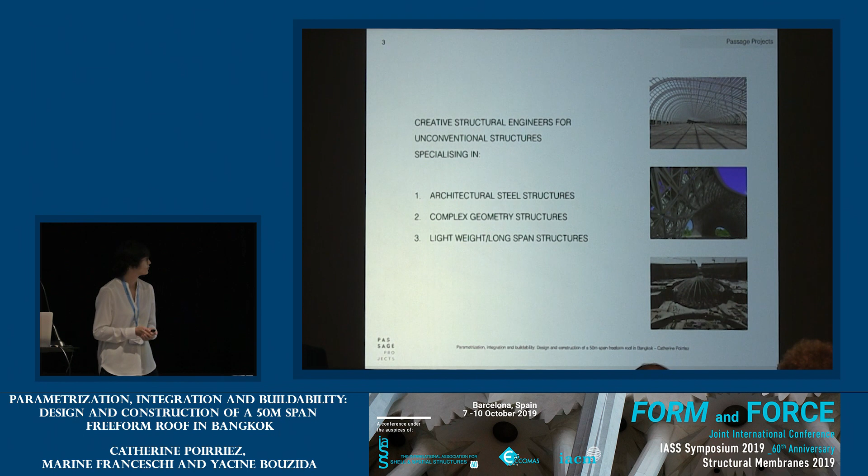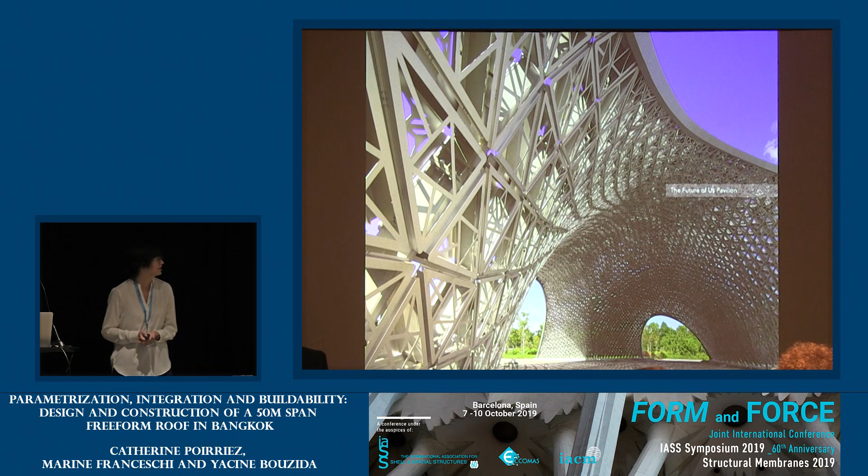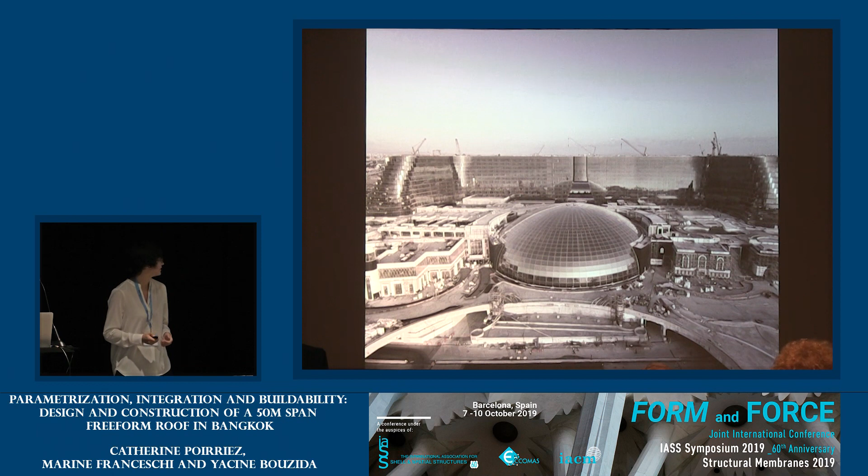Among some of the projects that we did, this is a grid shell in Singapore, a 50 to 60 meter span grid shell that we presented a few years ago at IASS, just down Marina Bay Sands for those who know Singapore. A steel and ETFE roof in Singapore as well, and a 100 meter span dome in Manila that we presented 2 years ago at IASS. And this is the Whizdom roof in Bangkok, which is the subject of today's presentation. This is an external view, and here is an internal view.

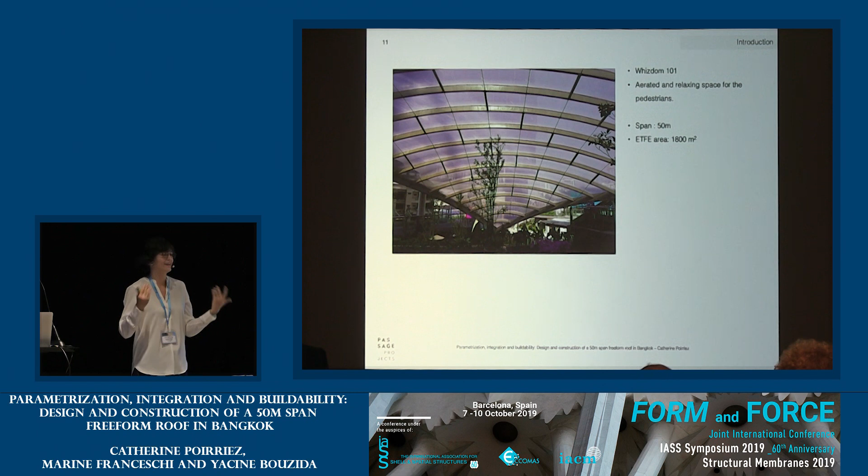Whizdom 101 is a new, high-end, fully integrated and digital mixed-use development that comprises both residential towers and commercial spaces. The center of the commercial spaces is covered by a 50-meter span steel structure that is covered by about 1,800 square meters of ETFE. It provides an aerated and relaxing space for the pedestrians.

We can see here a plan view and an elevation of the roof with the main dimensions. So the span is 50 meters, the length is about 56 meters, and we can see on the elevation that the roof is spread over 3 levels. For the supporting conditions, we have 4 primary support points spread over 3 levels, and 3 secondary support points. The secondary support points are here for vertical loads only.

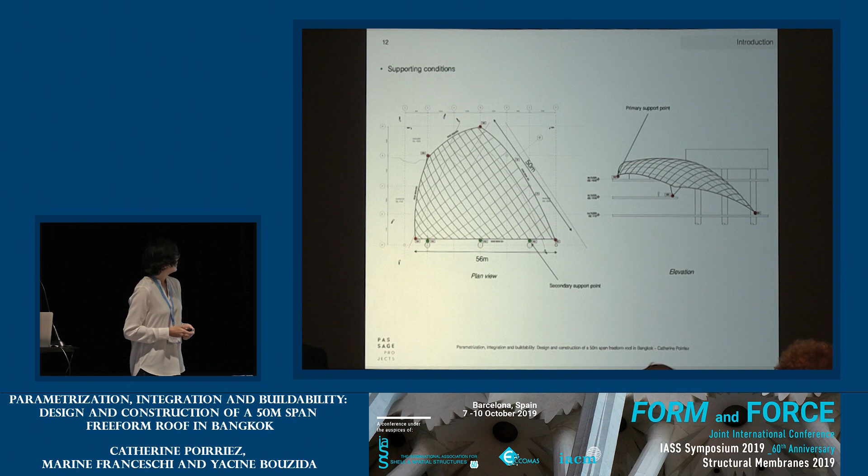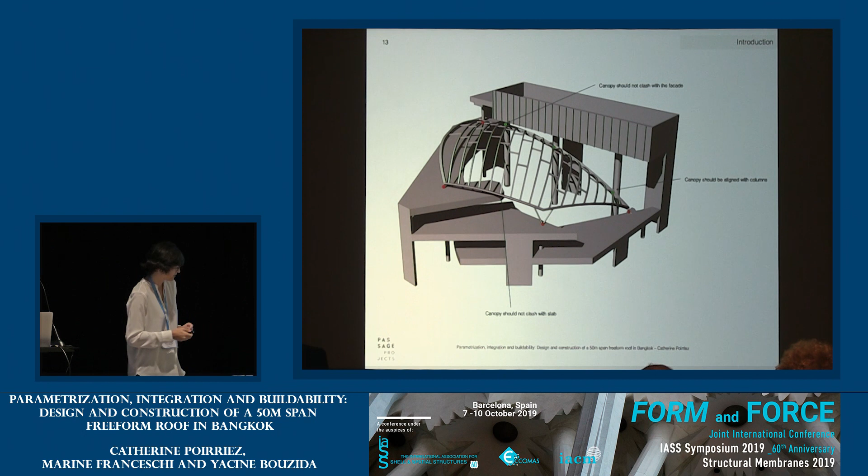It is probably better if we see it in 3D. So in 3D, we can see in red the primary support points and in green the secondary support points. We can see here that the space is quite constrained for the roof. Some of the main constraints that we had were first that the canopy should not clash with the facade. The canopy should be aligned with the columns along the tower. And the canopy obviously should not clash with the slab.

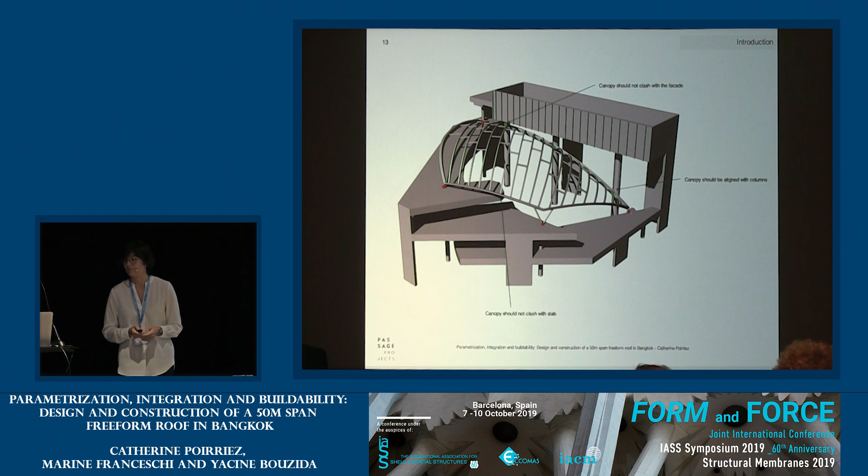In terms of structural design, the design follows the American code. The roof should be designed to sustain its own self-weight, the weight of the ETFE and the aluminum extrusions, which was estimated to about 10 kg per square meter. The weight of the M&E, which is lighting, fans, for example, which was estimated to 10 kg per square meter. In terms of live load, it's only for maintenance, so it's 24 kg per square meter.

Wind loads were defined based on a wind tunnel test, and pressures vary from 0.5 kPa to minus 0.75 kPa, applied normal to the roof surface. Load combinations follow the American code. There are small earthquake loads in Bangkok, but they are very small and did not govern the design, so I will not go into more details about that here.

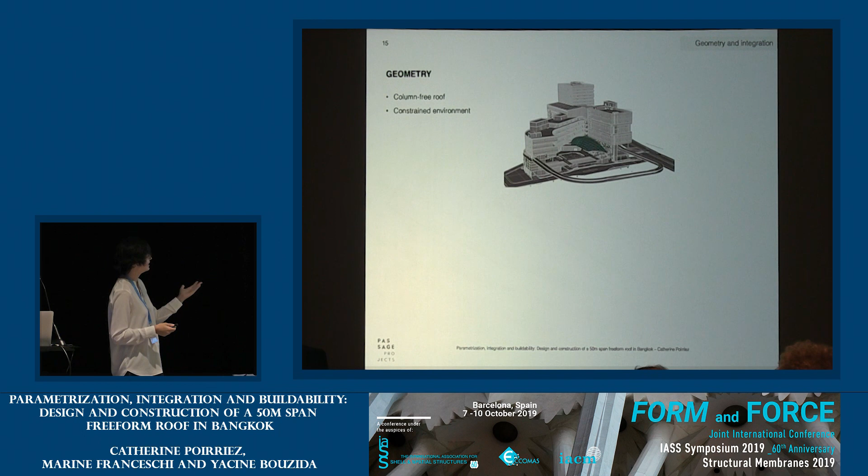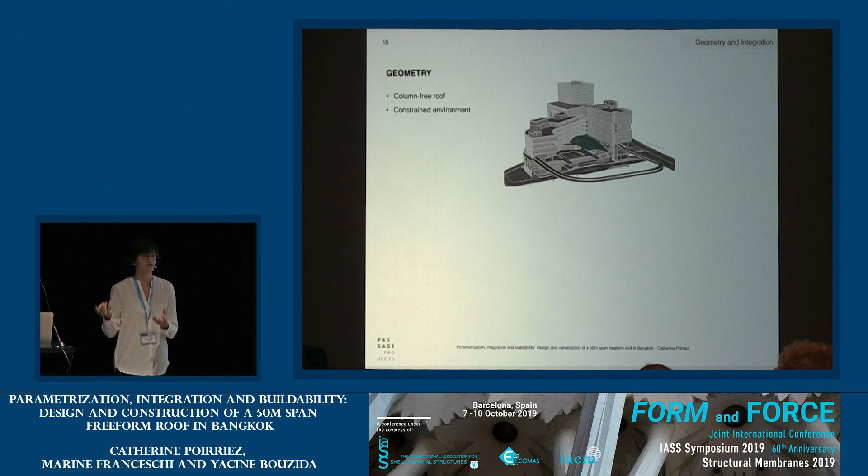In terms of geometry, the client wanted a column-free roof, but we saw previously, and we can see on this image that shows all the towers around the roof, that it's a pretty constrained environment. So we did several iterations and studied several options in order to find a structure that best fits in its environment and with the supporting conditions that we had. So we have here 3 options that we studied at early stages of the design.

We wanted to have a roof that was elegant and that provided a sense of relaxation, basically, for the commercial spaces. So option 1 is obviously not very elegant, so it was quickly eliminated. Option 2 presented, let me try to see if I can make that work. Yes. So option 2 presented a kink in the surface around here, because we were trying to connect to the mid-level support.

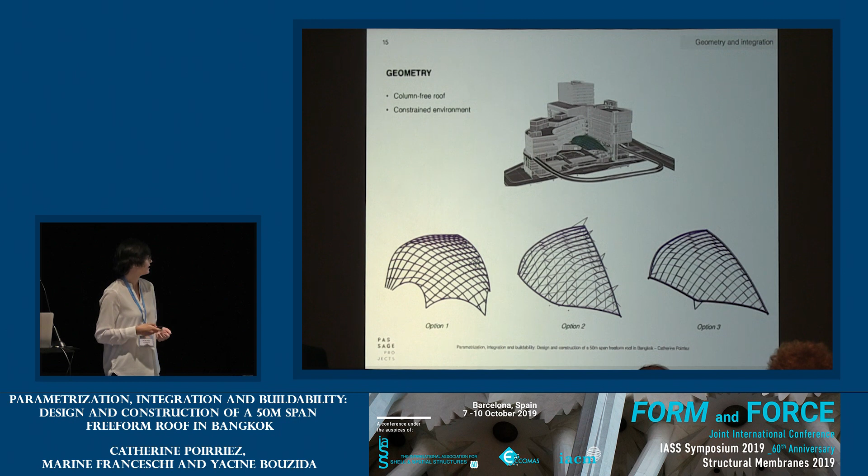So the kink was not very pleasant architecturally. Option 3 consisted of keeping the same kind of system as option 2, but introducing a column which enabled us to keep the surface reasonably smooth and elegant. So this was the option that was adopted.

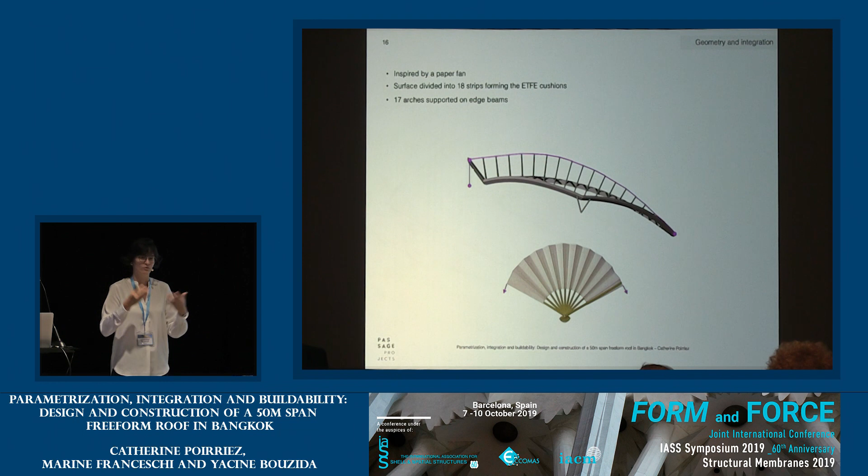So the surface is inspired by a paper fan. It's divided into 18 strips that form the ETFE cushions. And these 18 strips are supported on 17 arches, which themselves are supported on edge beams that spread back the loads to the supports.

A 50-meter span cushion can be a bit long, and so in case of damage of a cushion, it could pose a risk to operations of the mall while we wait for a replacement of the cushion. So we suggested that these long ETFE cushions were divided into several cushions in order to reduce the risk for the client and to facilitate the replacement in case of damage.

We can see here the cushion layout, and longitudinal beams between the arches were added in order to divide the cushions. So we can see here in 3D, we have the longitudinal beams that were added between the arches and the edge beam. Of course, the longitudinal beams have a second purpose. They provide a restraint for the arches.

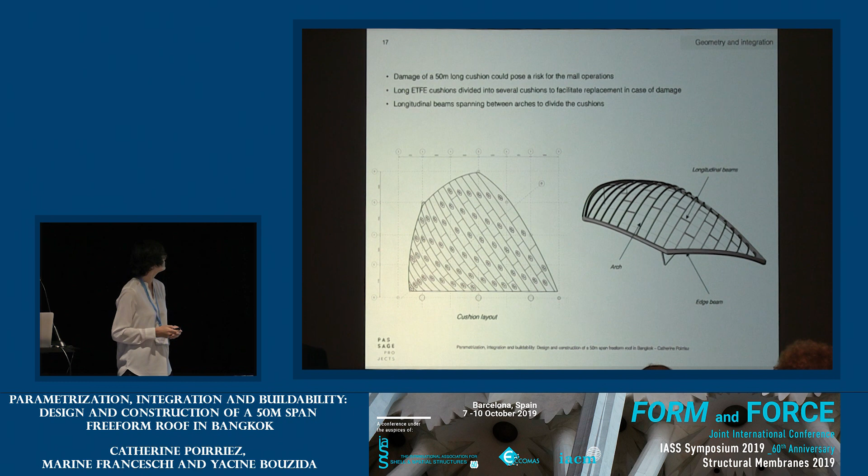So in Thailand, rain events can be pretty heavy, so you need to have a gutter in order to avoid water free flow in the commercial spaces. So we needed a gutter around the roof, which means basically around the edge beam. The gutter dimensions were defined by the M&E engineers to be 800 millimeter wide by 250 millimeter deep. And the roof was treated as an architectural feature, so we want the gutter to be treated as an architectural feature too. For that, we studied several options.

The first option was to have a cladded aluminum gutter. This is basically a traditional gutter design. We have an aluminum gutter connecting to the edge beam. In order to keep this nice architecturally, the gutter would have to be cladded, and this cladding would have to be segmented. So, first, the segmentation would not be so nice, and secondly, it would have a lot of joints, which would present a risk of streaking in the long term, which would not be very pleasant architecturally.

The second option was to have a steel gutter connecting to the edge beam. The steel gutter would have roughly the same shape as an aluminum gutter, but it can be curved and it does not need to be cladded. But imagine we have an edge beam that spans between 25 meters to 50 meters that supports the load from arches which are 50 meters span. So the edge beam is already quite big. And next to it, you add a gutter that is already 800 millimeter wide. So the whole buildup of gutter plus edge beam would have to be quite big, which would not be very elegant.

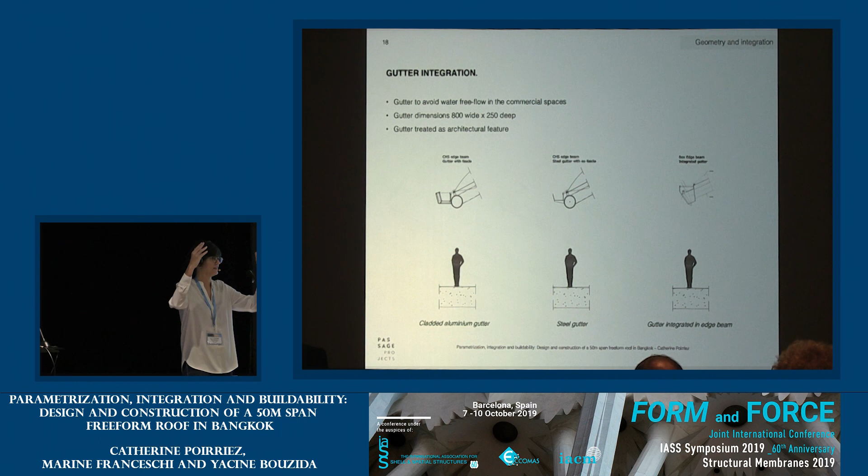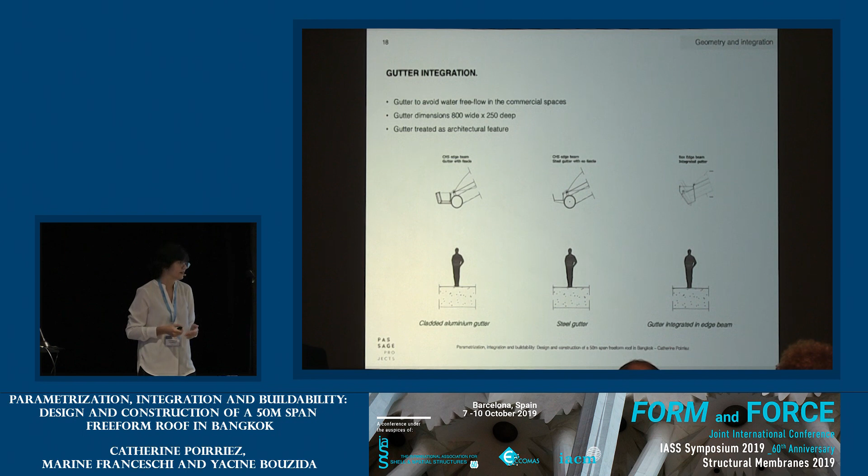So the third option that we considered and that we chose was to integrate the gutter in the edge beam. For that, it was basically to do a steel section with two ears protruding out of the section and creating the gutter just on top of the section. Because this section is quite big, we decided to use pentagonal sections that translate into a language of lines, which is a bit more elegant from an architectural point of view and looks a bit slimmer than if it was just a really fat section.

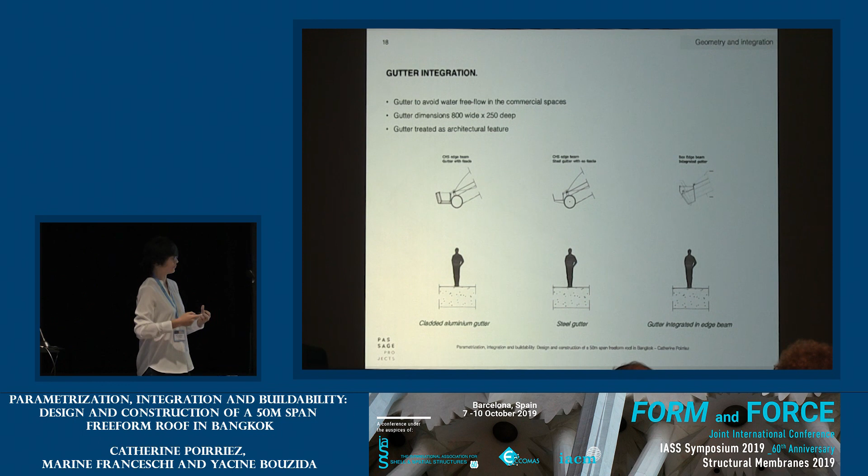I said previously that the longitudinal beams provide a restraint for the arches, but additional bracing was required to properly restrain the arches. We decided to use tension rods in order to keep the structure reasonably light-looking and to facilitate the installation. So we have studied several bracing patterns. Four of them are shown here.

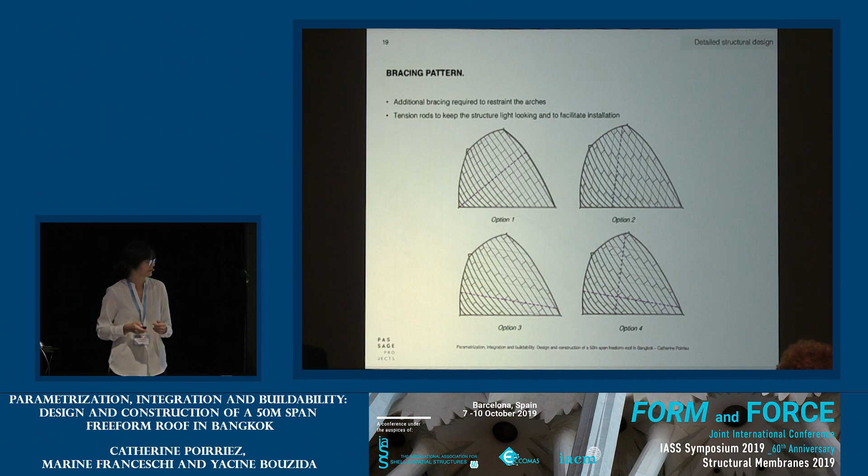The first one is to have a bracing that is parallel to the longitudinal beams. The second one is to have a bracing oriented at 45 degrees from the longitudinal beams. The third one is the other 45 degrees. And option 4 is to have the two diagonals. Option 4 would require twice the number of tension rods and twice the number of connections. So from a cost point of view, that would be more expensive, so we decided to quickly eliminate it.

We've done a comparison between the structural efficiency and the elegance for each option. The roof design is governed by deflections, so structural efficiency was measured by comparing the deflections of the roof under wind load. We can see here some analysis results of deflections under wind load for the three options, and a comparison table with results for each bracing pattern.

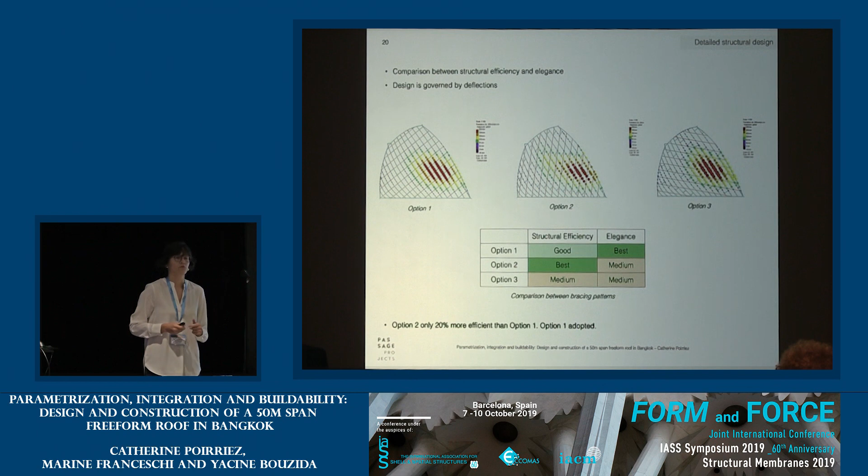So option 1 has a good structural efficiency and the best elegance. Option 2 has the best structural efficiency and a medium elegance, and option 3 was quickly eliminated because it has a medium structural efficiency and a medium elegance. So the question now is which option to choose between structural efficiency and best elegance. Option 2 was only 20% more efficient than option 1. So we decided to choose option 1 because it was the best compromise between structural efficiency and elegance.

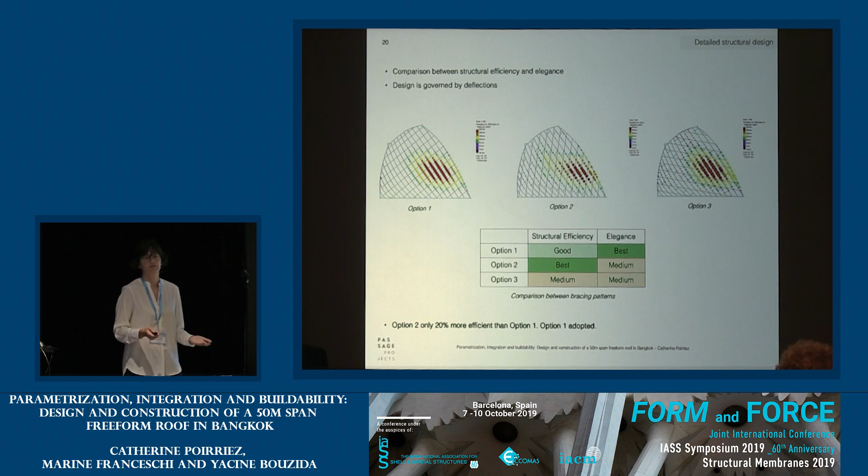Global stability of the roof was checked with Eurocodes because it gives a little bit more detail than the American codes for such structures. So a linear buckling analysis has been carried out to find buckling modes with buckling factor lower than 10. And then a geometrically nonlinear analysis with imperfections included was carried out for buckling modes which have a buckling factor lower than 10. Imperfections have been added in the model by using the deformed shape of the buckling mode for the buckling modes which have a buckling factor lower than 10, but just one at a time.

We can see here the first buckling mode under wind load. So the structure works as a series of almost independent arches. So it's not really subject to global buckling, and it's not really subject to snap-through either.

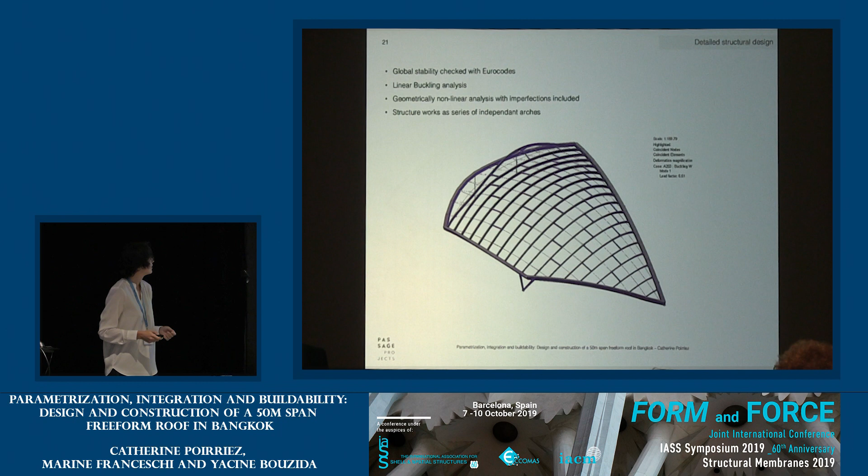So as a conclusion on the structural system, we have arches that are rectangular hollow sections from 500 millimeter deep to 325 millimeter deep. They transfer the forces to the edge beams through compression and bending, and tension as well if we have uplift. Edge beams are pentagonal hollow sections. They integrate the gutter. They spread the loads back to the support.

Longitudinal beams are I-beams. They provide a restraint to the arches. I will explain later. They're supposed to provide support for the cushions. And bracing are made of tension rods, and they provide a restraint to the arches as well.

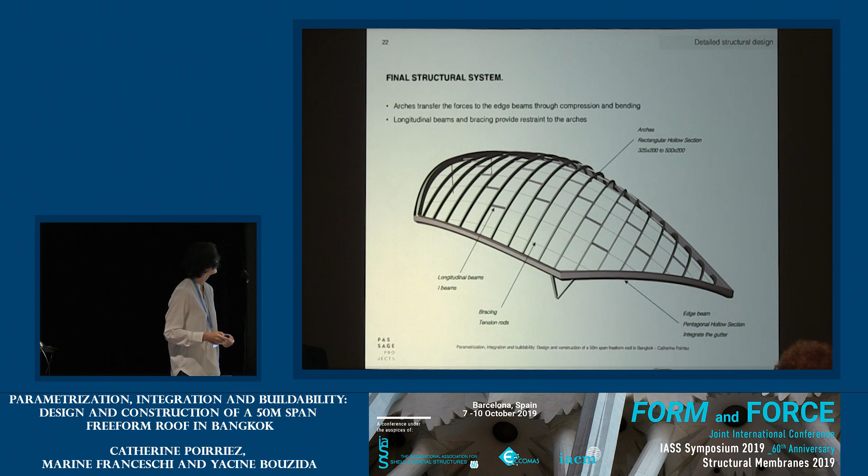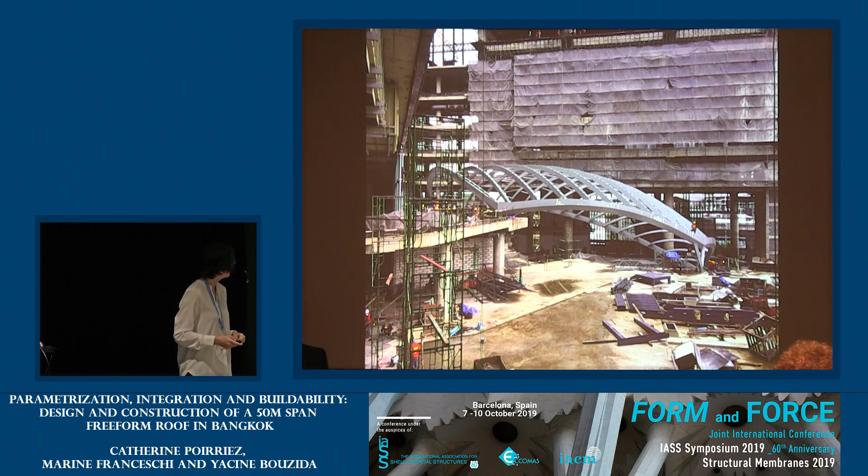Some images of the construction. We can see that the gutter was used by the workers as a working platform, which was very useful. And images of the inside.

So we saw that the geometry of the roof is reasonably complex, but it must be buildable in the end. And it's very important to be able to communicate this buildability simply to the fabricator, especially since with Thailand we had a little language issue. So it was very important for us to be able to simplify with really basic geometrical principles so that the fabricator could understand how to fabricate and build the structure.

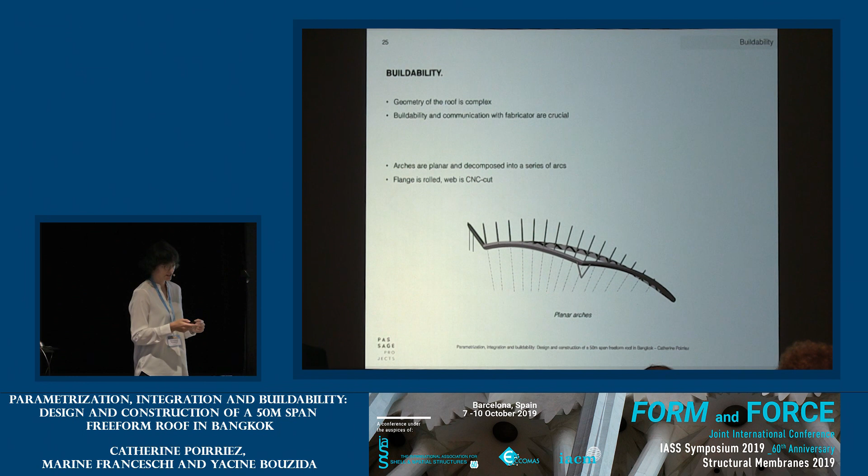For the arches, that was reasonably simple. The arches are planar and decomposed into a series of arcs. We've decided to use built-up sections, so the rectangular hollow sections are made of plates, which means that the flange can be rolled and the web can be CNC cut.

The edge beams are pentagonal sections, as I said previously, and we had three main constraints on the edge beams. The first one was that the gutter bottom should always be horizontal. This was to enable installation of the rainwater downpipe outlet system, and this is a constraint that was given to us by the rainwater downpipe outlet contractor.

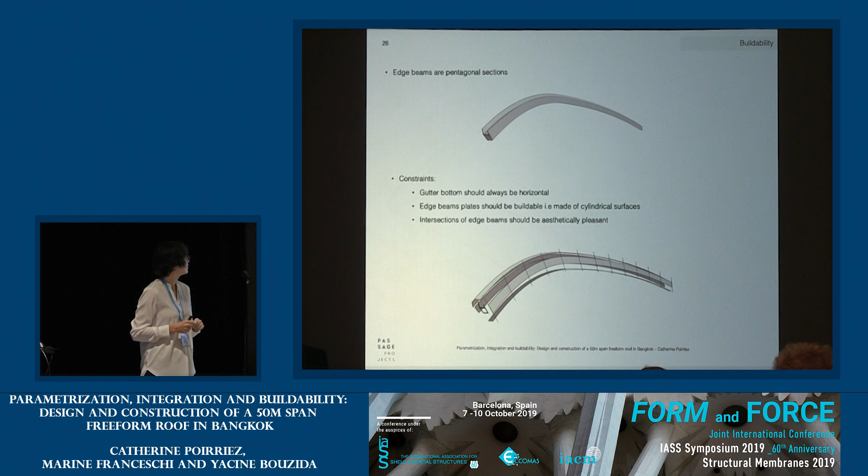The edge beam plates should be buildable, which means that they should be made of cylindrical surfaces. And the last one was that the intersection of the edge beams at the corner of the roof should be aesthetically pleasant. The section that we chose for the edge beam and the geometry that we chose for the roof did not really facilitate our life on that part.

The edge beam center lines are curved and planar. We can see in red here the edge beam plane. And on the section, there is only one plate that is parallel to the plane of the beam. And we can see there is no plate that is perpendicular to the plane of the beam. So the plate that is parallel to the plane of the beam is reasonably simple. It's just planar.

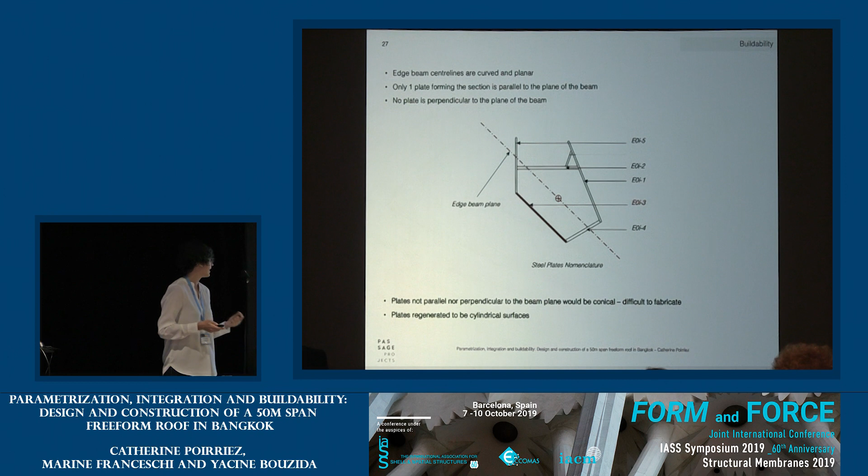But the other plates, which are not parallel nor perpendicular to the beam plane, would be conical. Conical surfaces in steel can be fabricated, but it's a bit more difficult and it's a bit more costly. So we didn't want to do that, and so we had to regenerate all the plates with cylindrical surfaces. This was done in two phases.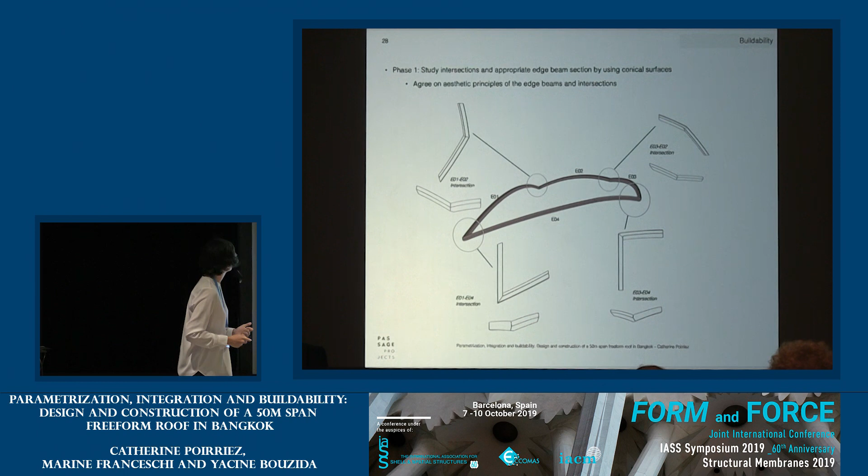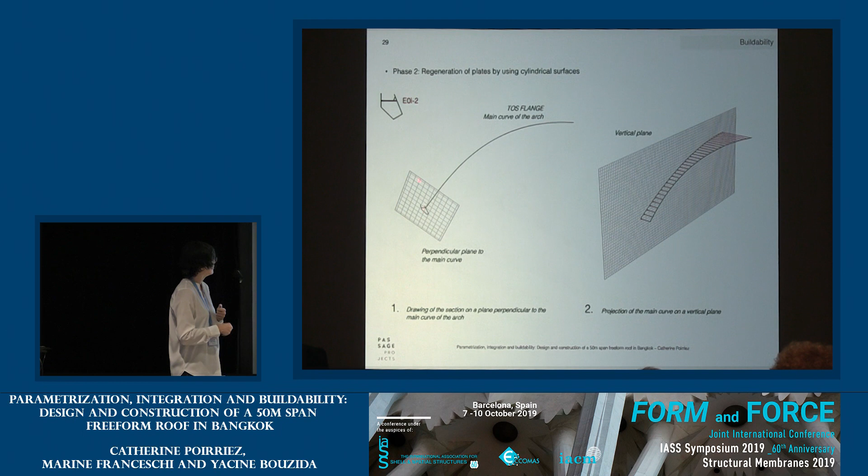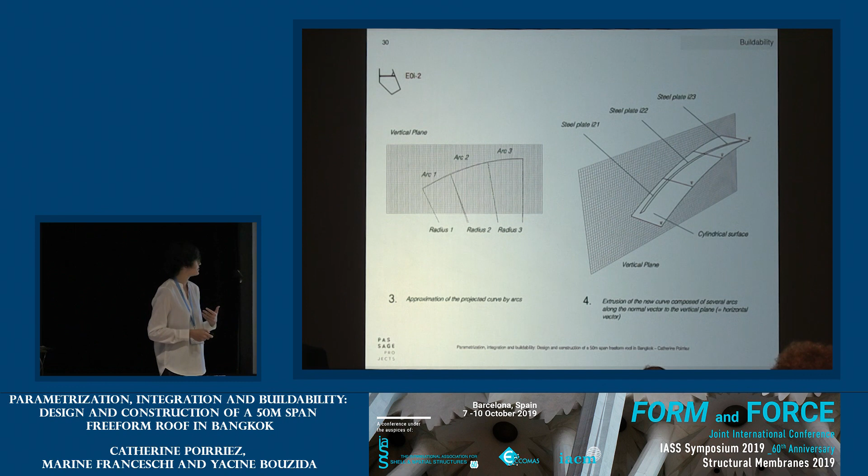Once this was done, we could regenerate all these plates by using cylindrical surfaces. So we did that by using a series of projection and approximation into arcs. So if I take the example of the gutter bottom, what we did is we took the gutter bottom plate, which is this little one, oriented perpendicular to the main curve, and we drew a vertical plane that is basically kind of normal to this section. We projected the main curve on the vertical plane. The new curve obtained on the vertical plane was then approximated into different arcs, and then the arcs were extruded into cylindrical surfaces, and the plates could just be redrawn on the cylindrical surfaces.

So these steps were repeated for each plate and each edge beam, and of course, because of the projection and the approximation into arcs, we had small deviations from the initial conical surfaces that we had done. So to ensure that we have a perfect intersection for each edge beam, we established a parametric model in order to be able to move the edge beam points until we have a satisfying result. So for example, in black here we have the points of one edge beam, in red the points of the other edge beam arriving at the intersection, and we just moved the points on the parametric model to get a perfect intersection.

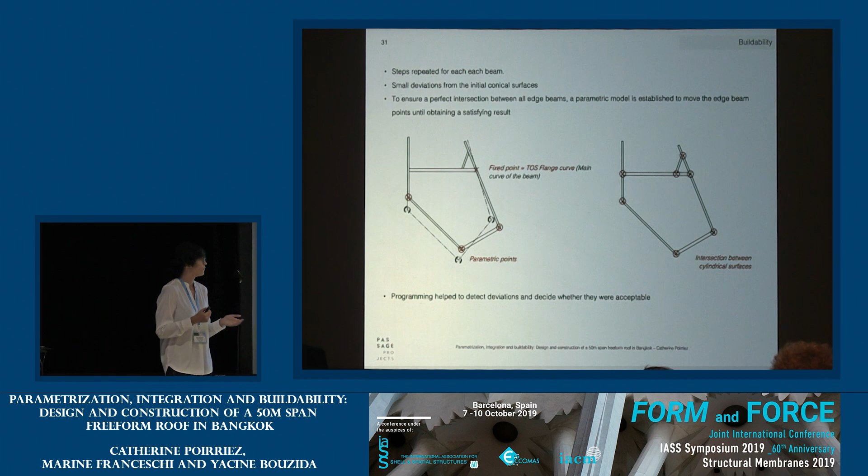So I said earlier that we had 3 main constraints on the edge beam. So first, to have cylindrical surfaces. Second, to have nice edge beam intersections. And the third one was to have a horizontal gutter. So life would be too simple if we managed to have the 3 of them perfectly. So I just showed that we achieved the first 2, and the third one was geometrically impossible to achieve with reasonable lengths of plates. So we used programming to detect the deviations of horizontality in the gutter plate and decide if these deviations were acceptable or not. For us, these deviations were within the tolerance of fabrication of the steel and the tolerance of the rainwater downpipe outlet system installation. So they were considered acceptable.

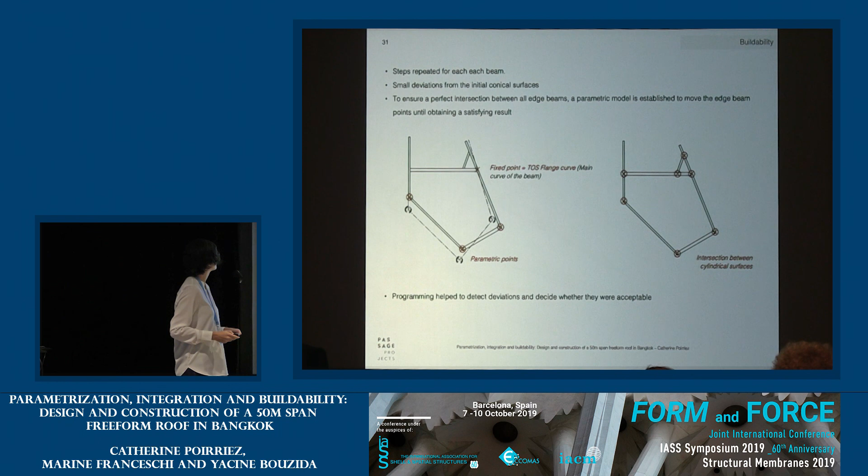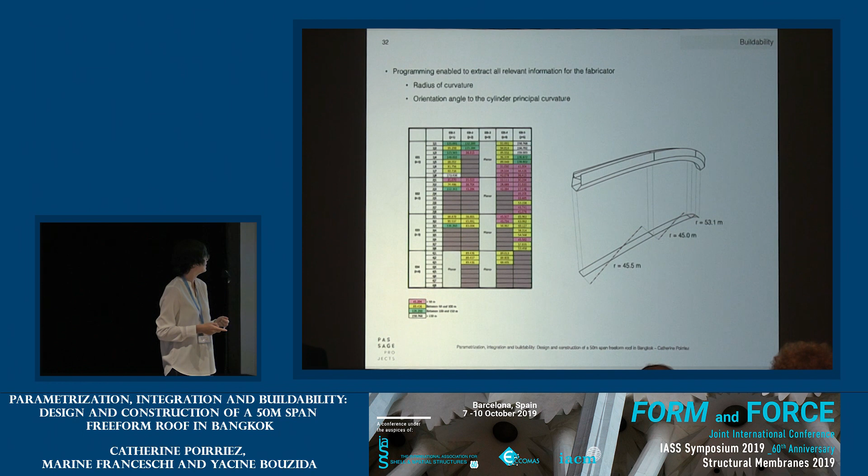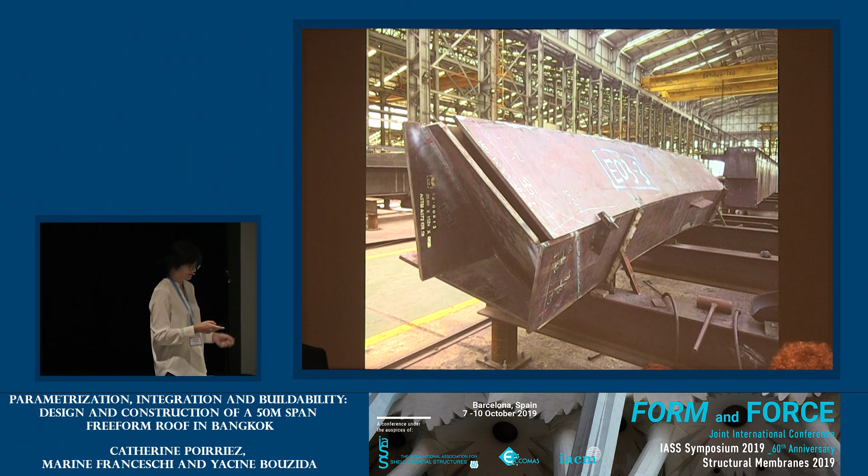And programming also enabled us to extract all the relevant information for the fabricator, which means basically for the plates of the edge beam, the radius of curvature, and the orientation angle of the plates to the cylinder principal curvature. As we can see on this image, the plate is part of a cylindrical surface, but is not necessarily oriented in the principal curvature line of the cylinder. So we had to give the angle to the fabricator. Here is an image of the fabrication of the edge beam, where we can see the plates being welded together with some internal stiffeners as well. And another image where we can clearly see the gutter basically here.

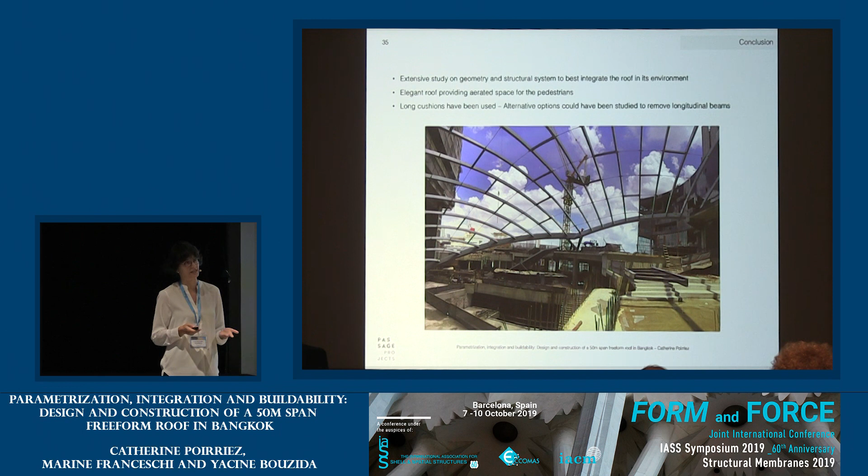So as a conclusion, an extensive study on the geometry of the roof and the structural system was done, and that enabled us to try and best integrate the roof in its environment. We think that we managed to achieve an elegant roof that is providing an aerated and relaxing space for the pedestrians. One thing to note is that at tender, the ETFE contractor proposed to use long cushions because they were reasonably confident that it would not pose a problem in case of damage of the cushion. So we didn't have further time to restudy, but with more time we could have studied alternative options in order to remove the longitudinal beams and have an even lighter looking structure. One image of the completed roof and another one.

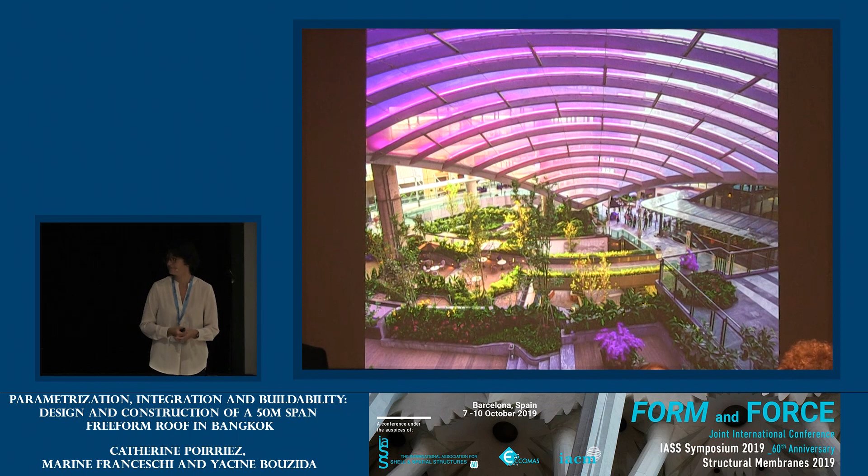Thank you very much, Catherine, for this amazing talk. Who would like to ask a question? That edge beam is just incredible. Some questions? Yeah, please. Should you? I don't know how this works. You're going to do it?

This edge beam, the built-up section, how did you compensate for the shrinkage due to the welding? It has a lot of welding. How did you compensate this? The geometry is very complex, though. Yes, it is very complex, and I have to say this is the amazing work of the fabricator. It's ITD, Italian Thai Development. It's a big fabricator in Bangkok, and they are pretty amazing for steel structures, and they really know how to play with the steel. So they manage all that part.

Okay. Are there any other questions? Mm-hmm. I'm going to ask a question. So you talk a number of times. I mean, I'm amazed by the complexity of the edge beam. I won't ask any questions about that.

You talk a few times about the structure being elegant, and also when you present the three options, you present, oh, this one is obviously not very elegant, and this one's much more elegant. How do you make those choices? It's a bit subjective. But I'm wondering, how do you have these conversations, or what do you talk about when you say this is more elegant than this? It is completely subjective.

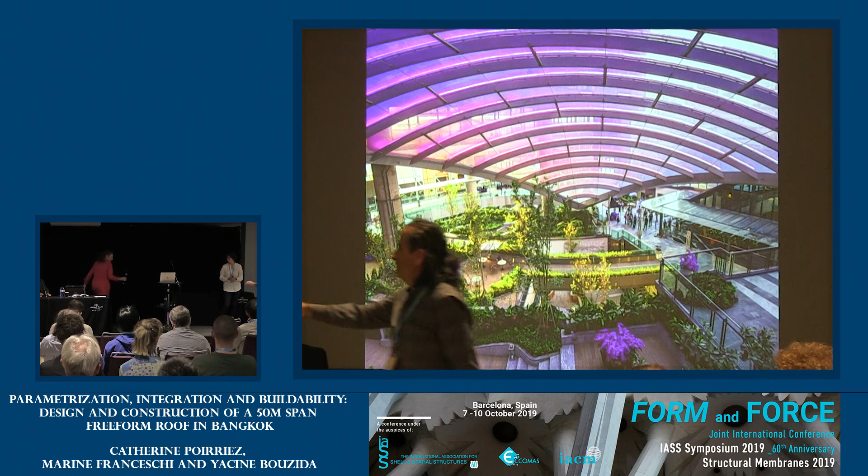Thank you for a very interesting presentation. It builds on Sigrid's question and how you answered it. So you tweak things. Was it all done with digital tweaking, or did you actually work with physical models to look at it, turn it around, go under it and above it? So we used mainly Rhino to do all the 3D modeling, and Rhino is quite helpful to look at it from below.

But at some point we made a 3D printed model so that we could show it to the client and help him understand how it would look in reality, because sometimes clients don't really realize how it is if we just show an image from the model. So we kind of used the two.

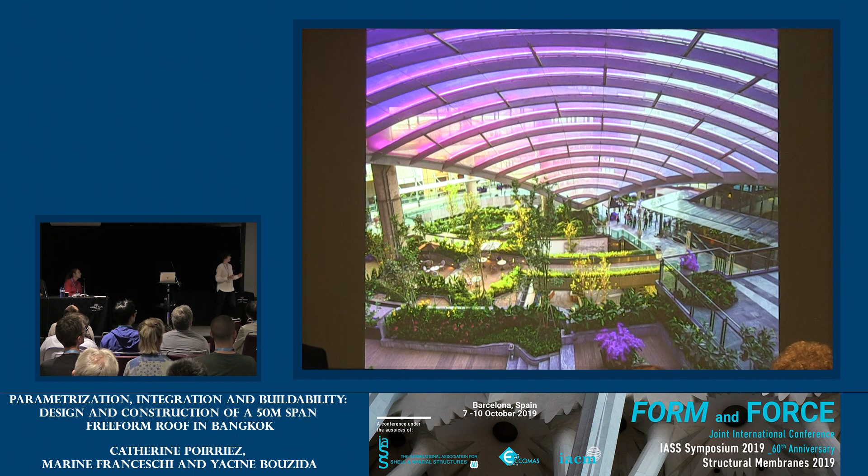Yeah, I think it's good because although Rhino is helpful, in the presentation when you talked about how one of the options was eliminated because it had a kink, it was not possible actually to see the kink. Yeah, I know. So I think working with the two was really good. Thank you. Thank you.